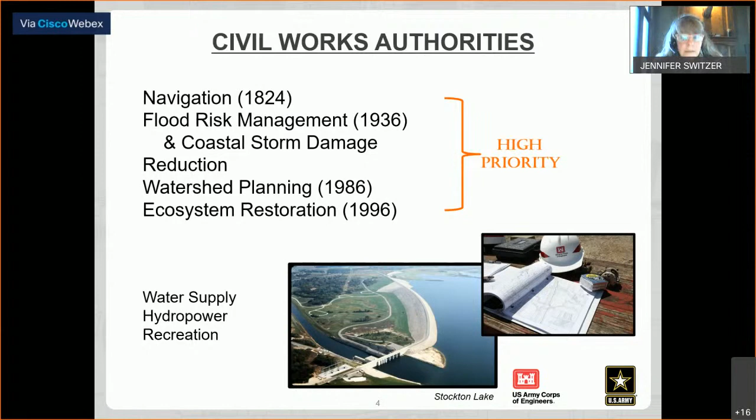Next slide. I wanted to talk a little bit about the difference between our legacy projects and our current, more modern day projects. Our legacy projects are really those that were authorized and built before 1986, when there was landmark legislation that changed the way the Corps of Engineers did business tremendously. These old projects include all the reservoirs in Kansas, but also the bank stabilization navigation project on the Missouri River.

What's key about these is that prior to '86, a lot of these federal projects were 100% federally funded. They were planned, designed, and built with federal funds, and then they were also maintained by the Corps. So these legacy projects, for the most part, retain U.S. Army Corps of Engineers O&M responsibilities - operation and maintenance - for the most part. There are some nuances, but generally the national tax base provides the O&M support for these projects.

Next slide. For more modern day projects, post-'86, in order for us to enter into a new project, the Corps really needed three primary things, and today this is still the case. We need a local non-federal sponsor to cost share the project, which includes in-kind work, but generally provides an in-kind contribution or cost share. We need authorization from Congress to begin a new water resource project, and that can be big or small.

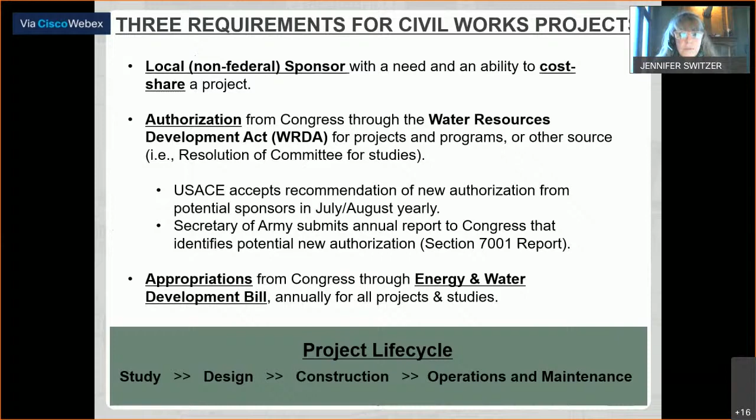That's a project where we're improving existing levees as a result of flooding that occurred in recent years. The cost of that project is about $71 million, and it protects about $2.3 billion worth of property.

Kansas City levees, in this case we're focusing on Armourdale, CID, and Argentine, which are primarily on the Kansas side, although some of that moves into Missouri. That project protects about $9.5 billion of infrastructure and is a $529 million project, a big civil works project for us. This one is special compared to the others in that the design and final construction is 100% federal, because Congress passed a supplemental bill in 2018 that allowed 100% federal funding.

Manhattan is a $32 million project, cost shared with the city of Manhattan, and protects $1.2 billion. Topeka's project is in the construction phase, also $29 million in cost, protecting $2.6 billion worth of infrastructure.

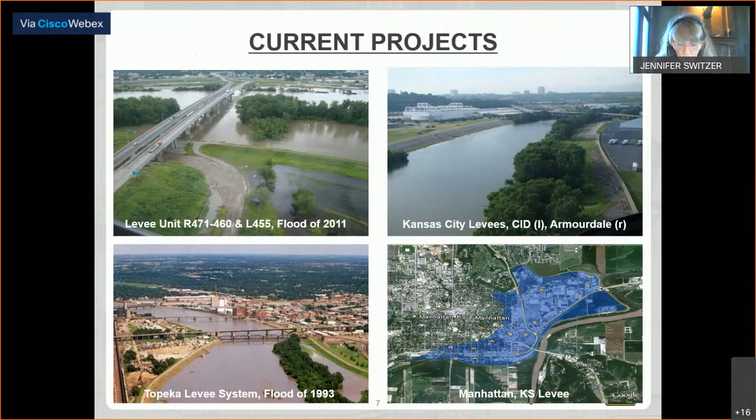All right, next slide. So I would be remiss not to mention one of our key partnerships we have going right now, and that's for the Kansas River Basin Watershed Study. That study is in partnership with the Kansas Water Office and Kansas Department of Wildlife Parks and Tourism. We're expected to complete that study in January of '24.

This authority, since the 50s, has been rarely used. The Corps hasn't been allowed or had the funding available to partner with agencies and non-federal sponsors to really take a hard look at a watershed scale. So this is one of a few of these types of projects going on in the nation, a really great opportunity for us to lay out a framework for future investment, both federal and non-federal, that's needed in the Kansas Basin to address water resource needs.

So we are going to be developing long-term solutions to a host of water-based problems identified by participants in our study, including sediment management, known flood risk issues in the basin, water supply availability and sustainment in our reservoirs, ecosystem restoration opportunities, and dealing with water quality and recreation. So again, this is a multi-purpose study.

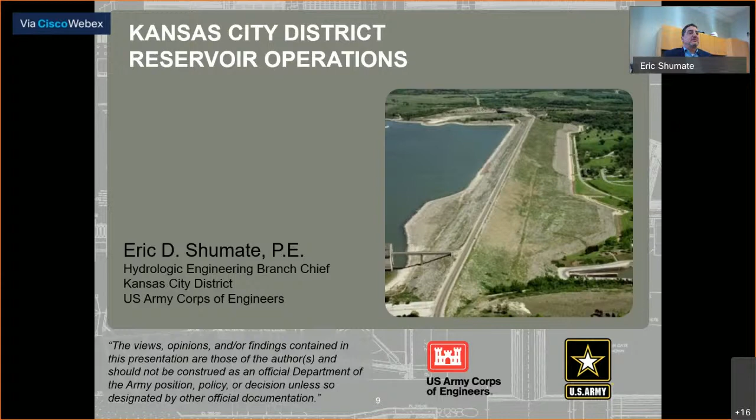My name is Eric Shumate. I am the chief of our hydrologic engineering branch. One of the aspects of my group is that we make the operational decisions for our 18 reservoirs within the Kansas City district. We also make operational decisions for some Bureau of Reclamation reservoirs when they are in their flood control operations. So I'll be happy to discuss some of our reservoir operations with you as we move forward.

First, I'll be talking about the Missouri River Basin system and the Kansas City District reservoirs and how we make flood control operational decisions. Second, I'll cover, since it's fresh in all of our minds, the 2019 flood event, which was really comprised of almost 2 unique flood events that I'll discuss as we get there. And then finally, an update of where we're at now, our path forward this year, and also some background of assistance we can offer through emergency management assistance to the state.

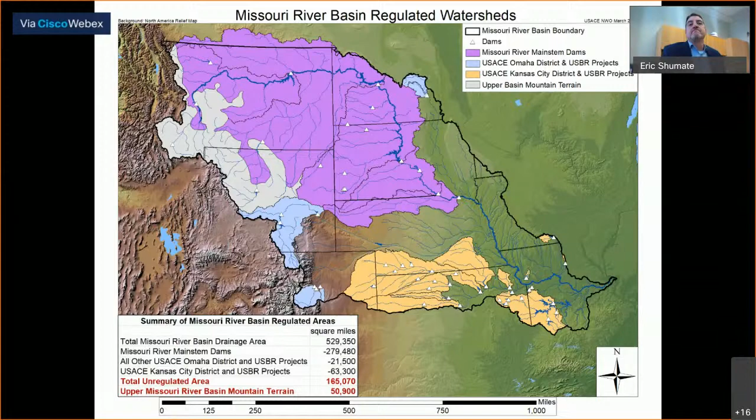Kanopolis and Wilson do operate - they are in the Kansas Basin - but they're so far west that they're primarily operated for targets around Salina and on some of the local rivers, the Saline and the Smoky Hill.

Our reservoirs are divided into three areas. The multi-purpose pool supplies water for water supply, water quality—that's the water you recreate on in a normal day—and also fish and wildlife support.

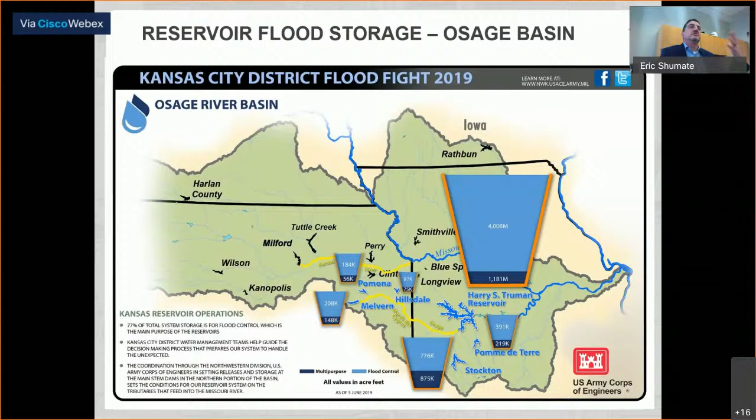Again, the same dark blue, light blue differential. One thing you'll notice here is the Truman Reservoir in Middle Missouri is by far the largest reservoir in our portfolio for Kansas City District, and it actually has the third largest flood control storage in the Missouri River Basin, even compared to those large upstream reservoirs. The Osage also joins into the Missouri River about 15 miles downstream of Jefferson City.

One thing I want you to take away is that even though we have multiple purposes, and on any given day a release may be made for any one of these purposes dependent on the basin conditions and where we're at in the reservoir, we have one priority, and that top priority is life safety.

Each release we make out of our reservoirs is governed by a water control manual that is laid out for each project—each project has its own water control manual—and each release is directly associated with one of the authorized purposes of that reservoir. When we're in multi-purpose, those releases can be for any of those multi-purposes: fish, wildlife, recreation, water supply, water quality, or in a couple of reservoirs, navigation support.

When we're in our flood control zone, we operate for flood control solely. These other purposes may benefit ancillary from those releases, but when we're in flood control, we're making decisions for flood control or flood risk management.

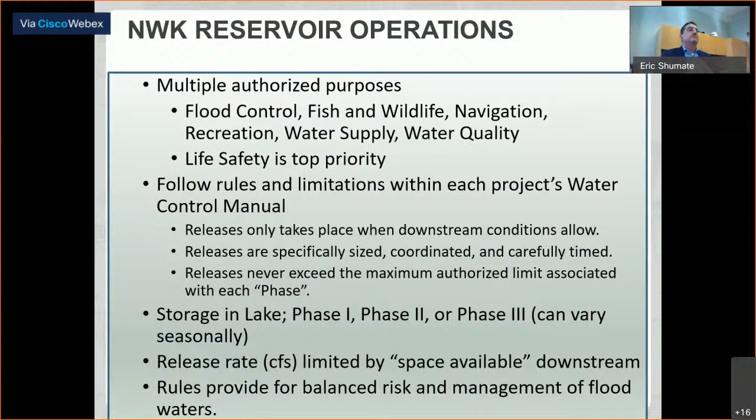Our storage is divided into three phases. Our flood storage is divided into three phases. And all these rules in our water control manuals that help us decide when to hold and when to let go or release water are all for the balanced risk and management of floodwaters, both for property and life safety.

The only way we provide flood benefits is to have empty space in that flood control storage. So it's important for us to get that water out of there when we have the space available downstream. So we will accept more risk, and that might be some damage to low-lying areas.

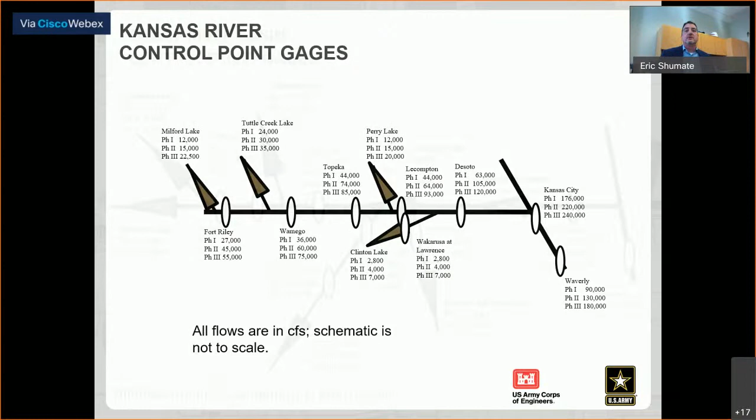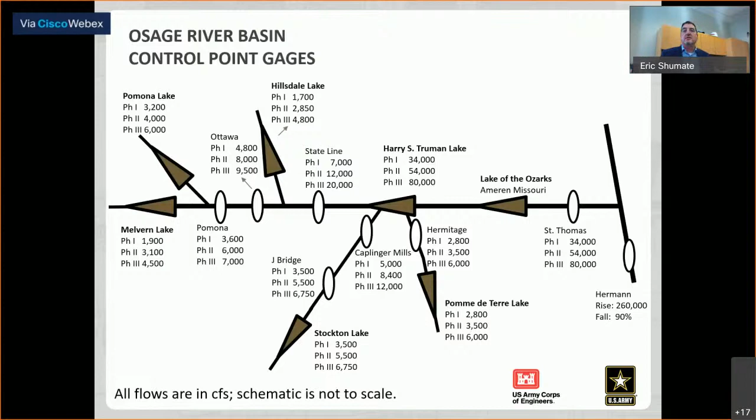Next slide. This is what we've developed, because when we're briefing, whether it be state or national congressional interest, or briefing our own leadership in a flood event, we've tried to come up with a way to visualize the status of our reservoirs in a quick one-page way.

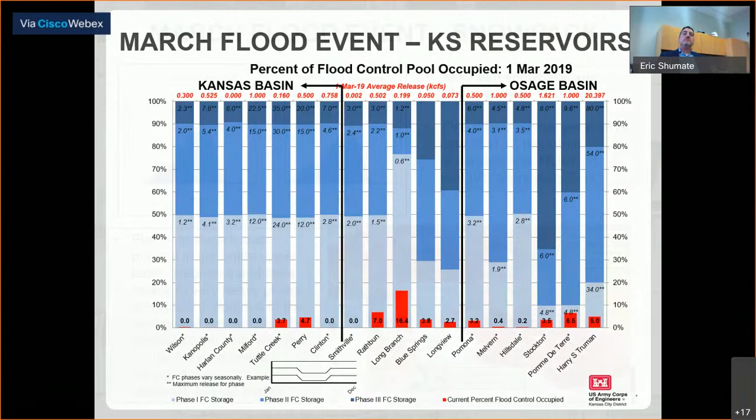The March event in 2019 - I'm sure most of you are familiar, but I'll briefly touch on it. We were fairly normal with our mountain snowpack that drains through the main stem reservoirs, but we had a heavy snowpack across the upper Midwest, just on the plains, ground snowpack. We had a rain event referred to as a bomb cyclone - basically like a mid-continent hurricane. It dumped a considerable amount of rain on top of that snow. The ground beneath that snow was frozen, so it was like pouring water on a parking lot. That warmer rain came down, melted that snow, and very little went into the ground. So we had almost full runoff straight off of much of South Dakota and Nebraska, where the rain and water just ran straight off, responding very quickly because there was very little infiltrating, and it got to creeks and rivers very quickly.

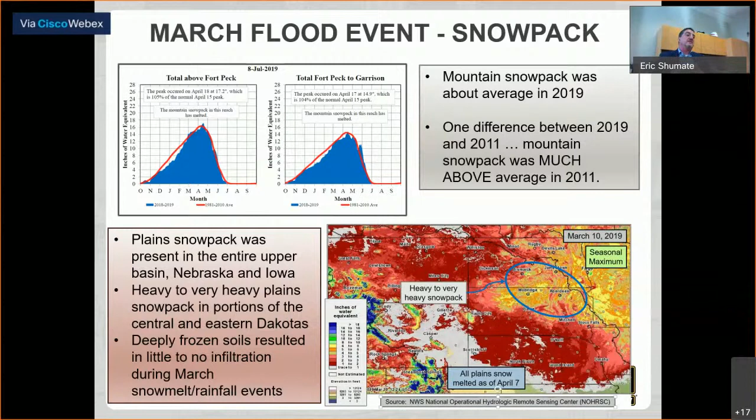So this is just a snapshot. As we went through March and subsequently April, we had high runoffs in the Missouri River Basin. Some of that rainfall and snowmelt also occurred in the Tuttle Creek basin and the basin tributary to Milford and Tuttle Creek, the Big Blue and Republican Rivers. So we started storing water in our reservoirs, particularly in the Kansas Basin, holding that water as a flood event was occurring on the Missouri River side. On the Missouri River side, I spent an overnight at Wathena, or Elwood, Kansas, at the levee in St. Joseph that Jennifer mentioned earlier. That water was over the top of the levee, but on sandbags there. So there was a significant flood going on there.

During the March event, that's why we held water in the Kansas Basin. That flood on the Missouri persisted through March and April. So we held water, and at Tuttle Creek we were about 50% full as we were coming into May.

Then in May - and I'm sure you're all aware of this - we got the wettest month on record in over 100 years of meteorologic record in the state of Kansas. Across the whole state, averaging the rainfall that occurred in May, we had over 10 inches averaged across the entire state. That flow came into our reservoirs, as well as directly into the Kansas River and the Missouri River, and continued. With that rainfall setting, we had the need to hold water because we were above our target releases and had downstream flooding on the Missouri River. We continued to hold water in our Kansas reservoirs and also in our Osage reservoirs.

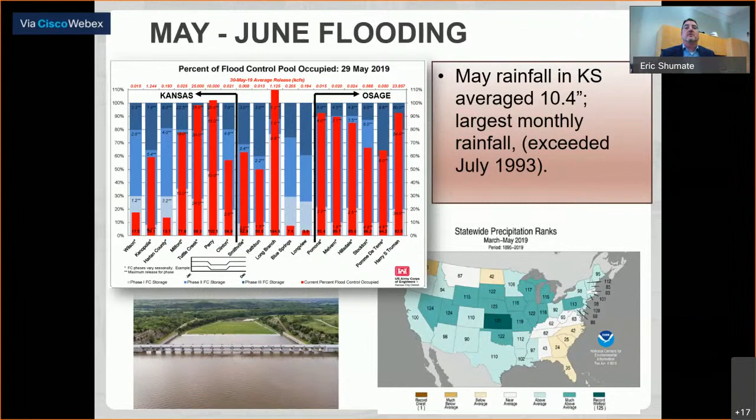Fortunately, from the gauging network we have upstream of our reservoirs and our forecast modeling that's available and that we utilize, we were able to operate this reservoir by making releases through the outlet works, or the tubes as they're referred to, and manage this entire event without having to open those Tainter gates at Tuttle Creek. Next slide.

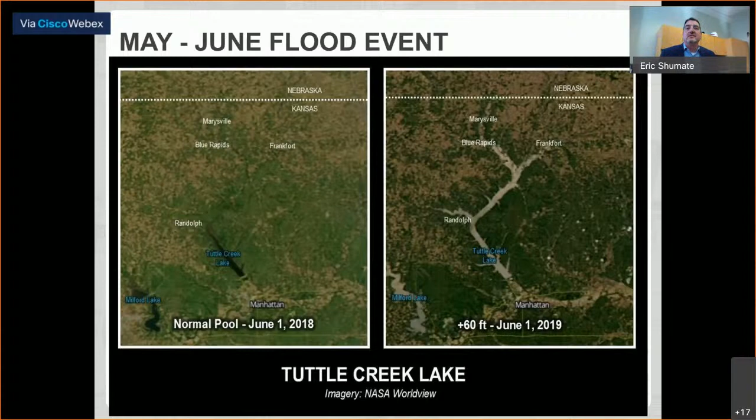This is just a snapshot to show you what Tuttle Creek looked like at the height of the flood event. On the left is 2018, that's normal pool. Tuttle Creek occupies about 16,000 surface acres. On the right, on June 1st of 2019, Tuttle Creek extended almost entirely all the way up to Nebraska and was occupying 54,000 surface acres. That's the result of having 60 feet of water held in Tuttle Creek on top of the multi-purpose pool.

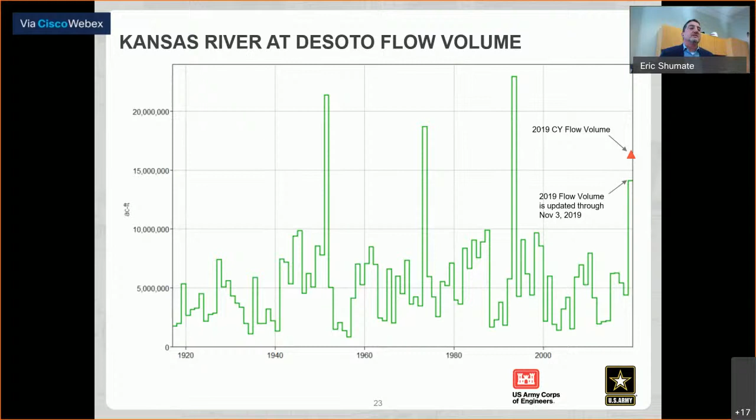So when we talk about holding water in the Kansas reservoirs for a target at Waverly, Missouri, it doesn't just mean that we're holding water for one small town on the Missouri River, but that target represents almost 60 miles of Missouri River and impacts the flood fields, levees, and other communities. So when we say we're targeting at Waverly, Missouri, that's just because there's a gauge to measure it there, and that represents operations for a long stretch of the Missouri River.

What you can see here is that we had more flow come through the Missouri River in 2019, over 25% more flow than we have had in any other year in over 100 years of record. It was a very significant flood, particularly on the Missouri River.

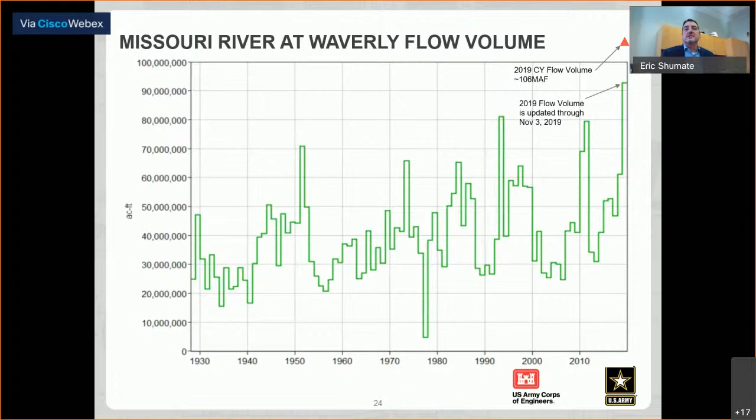So our impacts to reservoirs, on our peak day, when you looked at that blue and red graph I'd shown, we had over 9 million of our 11 million acre feet of flood control storage occupied, and that's across all 18 of our reservoirs. We had maximized the use that we could of all those reservoirs to minimize downstream flooding.

We had surcharge operations, which is where we're above the flood control capacity, and we're working to make sure we're making releases to restore and maintain safety at our dams, at 4 different dams. We had record pools at 9 reservoirs. Within Kansas, those would have been Perry, Clinton, Pomona, Melvern, and Hillsdale. Tuttle Creek was high, but it was higher in 1993.

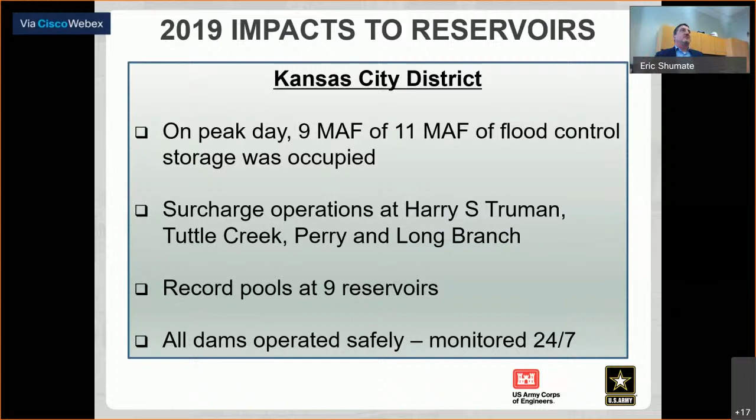One major takeaway is during these flood events, we get out there and we monitor. We have engineers and field staff on those dams 24/7 when they're loaded like they were in 2019. All dams operated safely, which is our greatest success, because our primary goal, again, is life safety and making sure we're operating our dams safely.

This is just a snapshot rolled up over the life of these dams. This represents, for the dams within Kansas, over the life of each of those dams, how much benefit has been attributed to the operations of those dams, damages prevented. You can see that of those dams within Kansas we've had over $24 billion through the cumulative life of those reservoirs of benefits, or damages prevented, within the operation of those reservoirs.

Some of you may remember 1993. I know I did. That's what got me so interested in water resources and the job I'm doing. I was throwing sandbags to fight floods and moving people out of the local area. I live near the Missouri River. Really got my interest in this.

We had a very different result, particularly in Kansas, in 2019 than we did in 1993. You can see these are some of the spillway releases that were made during surcharge in 1993 out of Milford and Tuttle Creek.

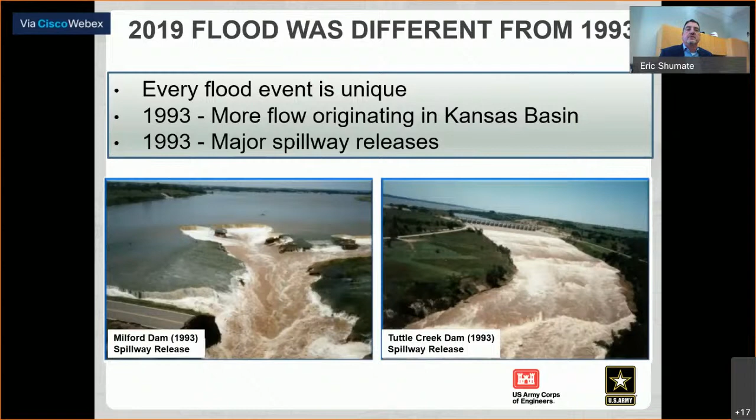First off, every flood event is unique. Where the rain comes from, the patterns, and the downstream conditions that dictate our operations are all unique. A major difference between 1993 and 2019 was that 1993 was just continual months of storms across north and central Kansas, producing so much inflow locally to Milford, Tuttle Creek, and some of our other reservoirs that we ended up having spillway type releases. In 2019, we did not have these releases in any of our reservoirs within the Kansas City district. All of our releases were able to go through the outlet works, particularly Tuttle Creek and Perry, even though they were both in surcharge, were able to be operated to pass all those releases through the outlet works, which ultimately is less damaging to the project and the downstream receiving stream.

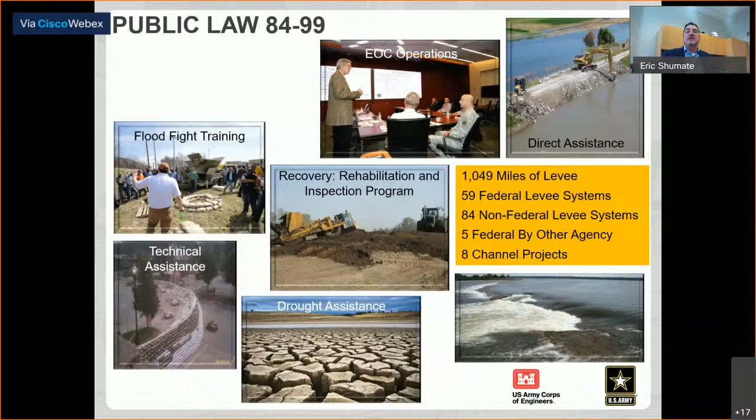The federal levee systems in Kansas City District are mostly within Kansas or along different locations on the Kansas River or the Missouri. We have some within our district - Lawrence, Topeka, Manhattan, Abilene, Salina, Ottawa, for example. Our non-federals in Kansas are primarily on the Missouri River side along that eastern edge of Kansas. Important to note, there are multiple other levees within Kansas, but those are in the Tulsa District area of responsibility.

The Kansas City District maintains a stockpile of flood fight materials. We're fortunate that there's also another regional stockpile in Omaha and a national stockpile in Rock Island. So we really do have a considerable amount of resources at our fingertips.

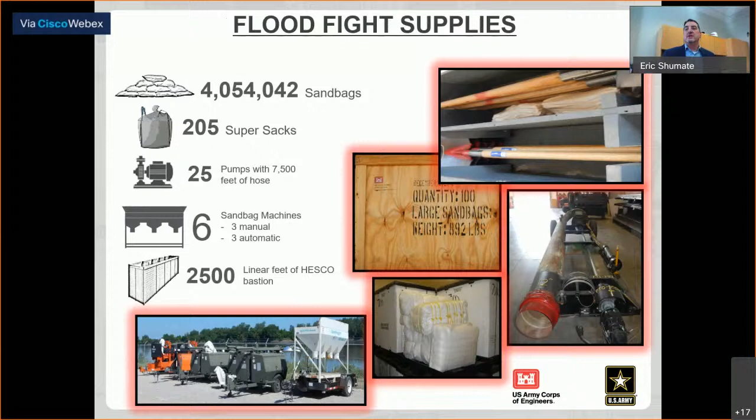We can offer sandbags when requested, as well as super sacks and pumps, and we also have the ability to have contracts where we can go out and do some bulk purchasing of pumps to allow locals to utilize those. All requests for our own supplies or equipment would be coordinated through KDEM prior to issuing - so just for your awareness, the request comes from a local group and is coordinated with KDEM.

And finally, as we own 18 reservoirs, 9 federal reservoirs in Kansas, we spend a considerable amount of resources and time doing the operation and maintenance to make sure we have safe projects. Maintaining that safety of that project is key to us. These are just a sample of some of the routine items that we do.

One I'd highlight is we do engineering periodic inspections every 5 years. We bring a full team out, inspect the health of that dam from top to bottom, every aspect of it. But we also do annual dam safety inspections, which are a little less rigorous, but still looking at the key components to ensure everything's operating safely.

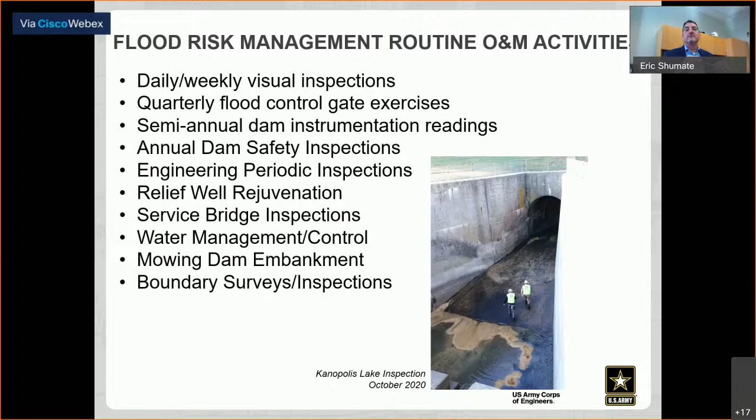Next slide. Oh, I got it. It just took a minute for it to pop on me.

All of our reservoirs are prepared for spring runoff. We have over 99% of our flood control capacity available to us today. So we're ready and prepared to intercept that spring runoff and operate our flood control storage as needed to mitigate the impacts of potential flooding as we move into the normal spring flood season.

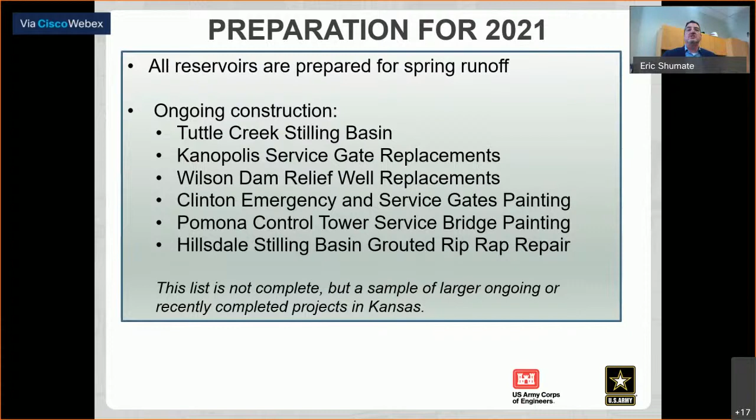So finally, that ends my portion of the presentation. I'm sure Jennifer or I would be happy to take any of your questions or discussion that you have. I know there's a lot of information in a short time, so anything that you have a question, please feel free.

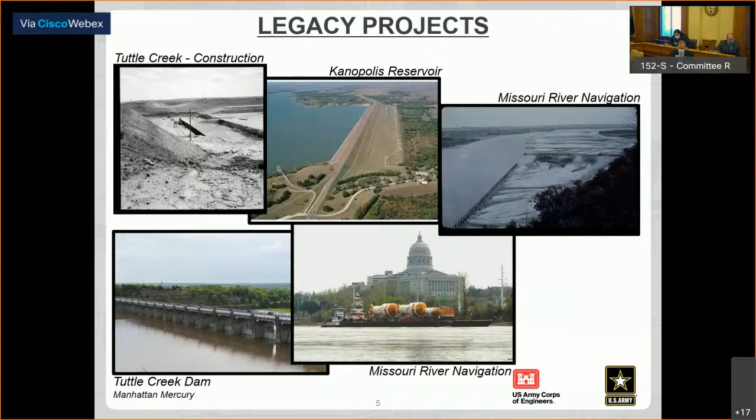I'll say our expert on Public Law 84-99 is not available today. We can get that answer back to you, I think, and would be happy to.

Jennifer, Ginger, do you have any other thoughts? Yeah, I was just going to say Judd Knieven is our Readiness and Contingency Operations Chief, and kind of teaches the course on Public Law 84-99. So we could definitely get a synopsis of what activates that, the different state involvements, and any issues, as we've now seen a few different types of disasters we've had to respond to, and see if there's anything he'd like to follow up with. But we can take your question on that.

Thank you. Yes, if you could get back with us on that question. We had one earlier. Representative Vaughn, what was that one? The water injection dredge pilot. Oh, great, I think money is a big problem on that one. But whatever information you can give us, we'd appreciate that.